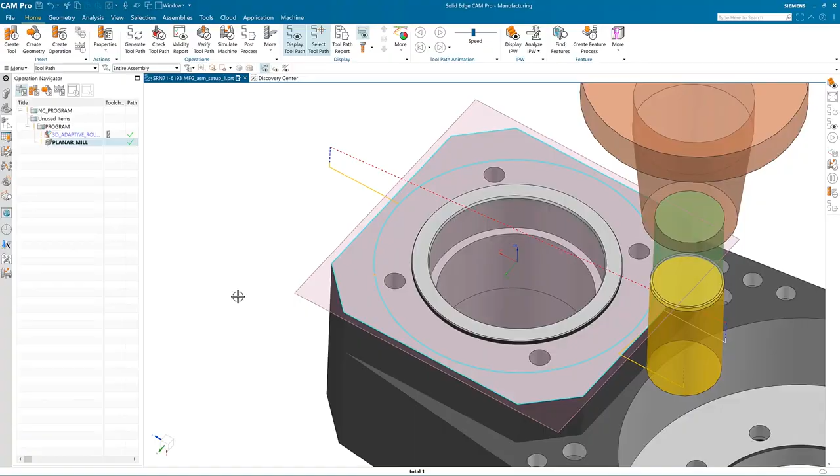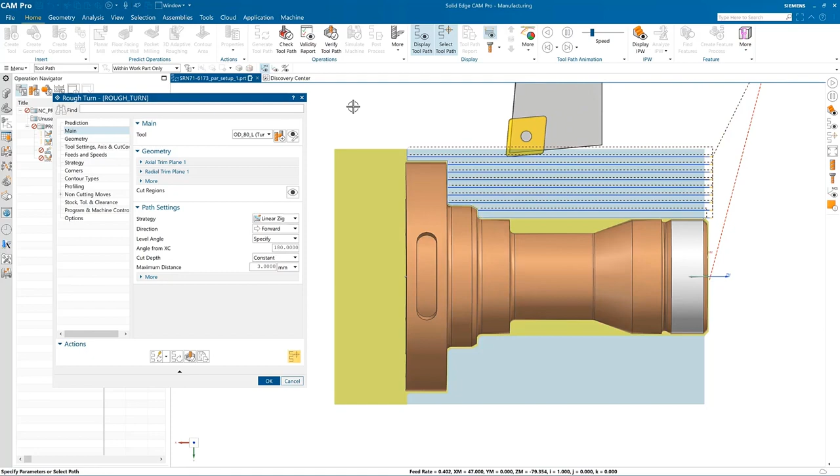With auto-generate for simple turning operations and certain 2.5-axis operations, you no longer have to generate the operation. As soon as enough parameters are available to calculate the toolpath, Solid Edge CAM Pro takes care of it. This makes NC programming faster, allowing you to review the results quicker. Similarly, any changes that require recomputation are automatically performed. See the latest results as soon as the parameters are changed.

Prime turning by Sandvik increases productivity by removing more material in a shorter amount of time, enabling faster speed and increased tool life. Using either Sandvik Prime Turn A or B turning tools, we can quickly, efficiently, and safely remove the material from this undercut. Notice how smooth the entrance and exits are, which produces less stress during the cutting and helps the inserts last longer.

3D adaptive roughing provides the most efficient rough machining possible. It reliably and dynamically checks for tool holder collision when the tool moves within a region or across multiple regions. Toolpath generation is faster, bottom-up cutting has been enhanced, and a top-off flat faces option has been added for faster throughput.

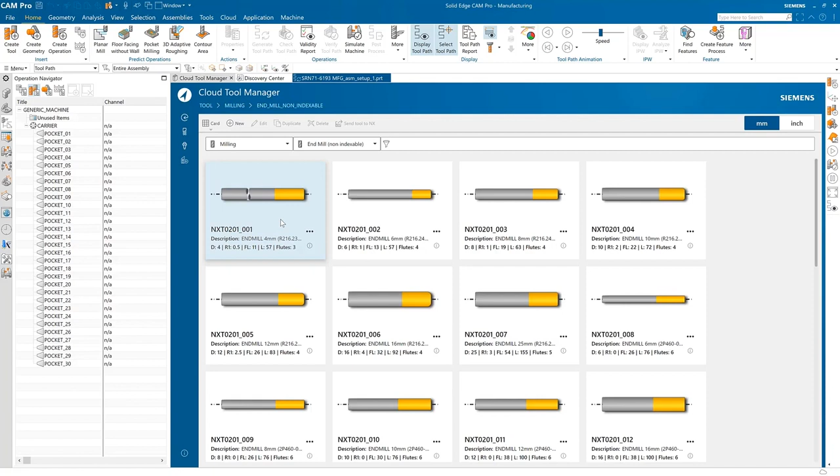The Cloud Connect tool library, as the name implies, stores cutting tools in the cloud database for easy access. Tools and holding devices can be easily searched, downloaded, and modified. Immediate access to cutting tool vendors is also available from the same location.

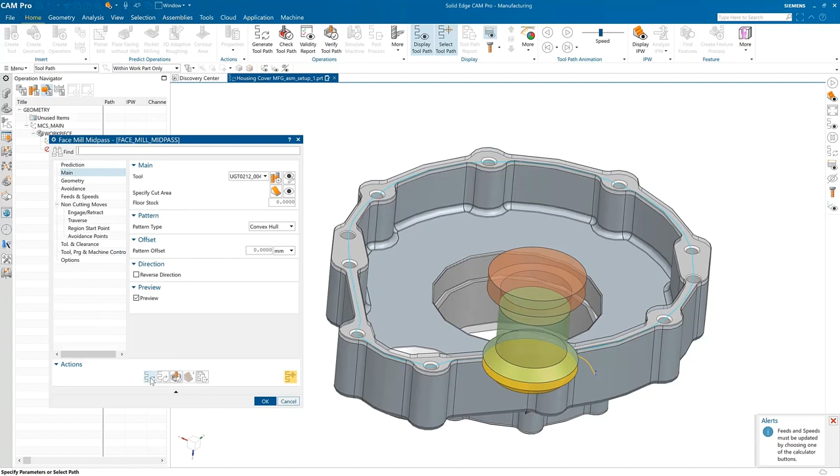Generate toolpaths on flat surfaces with complex shapes using the face mill mid-pass operation. This feature, perfect for the milling of casted flanges or any other oddly shaped flat surface, automatically calculates the midline distance between the edges of a face and places a toolpath on it. For users that desire the cutter to be off-center of the flange, the operation can also create a toolpath along a shape described as the convex hull of the face. The face mill mid-pass operation can greatly improve productivity for this type of machining, eliminating the need to manually create a boundary line for the cutter to follow. This allows you to create the operation in minutes as opposed to hours.

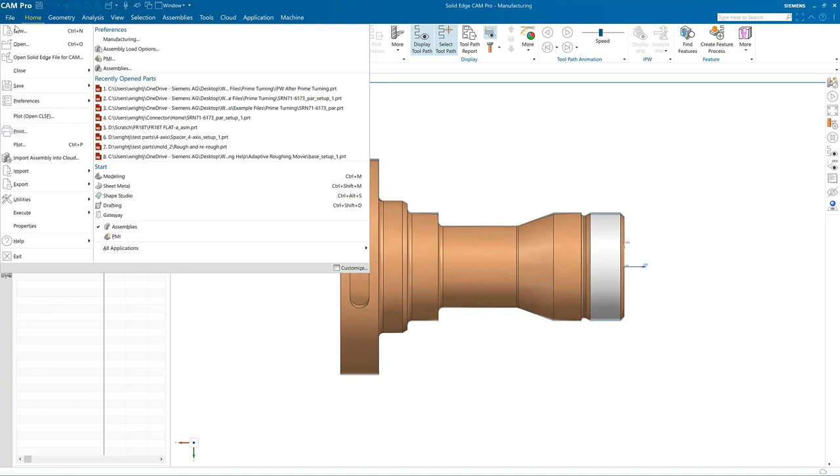Save your in-process workpieces as faceted bodies in separate files. These models can be used for future machining operations, the creation of manufacturing planning operations, or the construction of secondary machining fixtures and jigs. These in-process workpieces can be saved at any stage during the machining process, even in the middle of an operation.

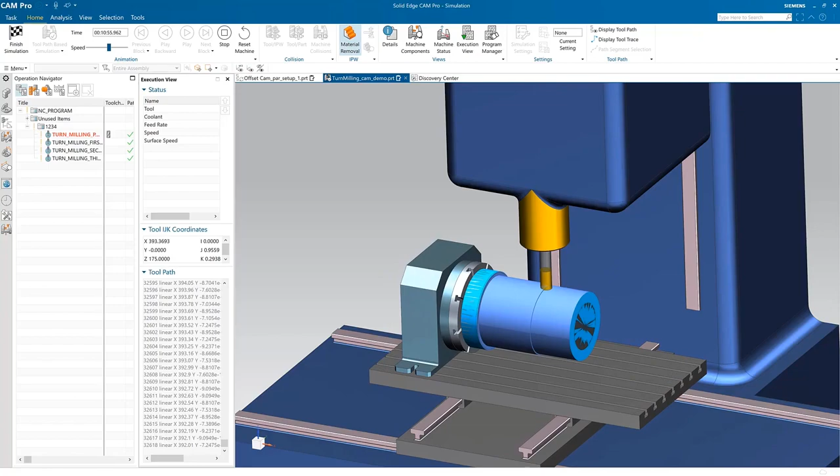Turn milling is designed to easily machine symmetric and eccentric cylindrical surfaces with high surface quality, precision, and high cutting volume. An operation subtype in the rotary milling template, turn milling is used to pre-cut cylindrical parts before finish machining with other rotary milling operation subtypes.

Solid Edge CAM Pro provides cutting-edge updates that accelerate machining while bringing the power of artificial intelligence and the cloud to your machining processes.